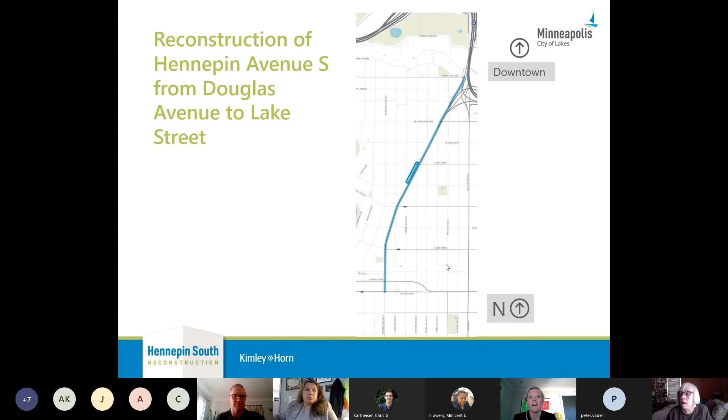Just a reminder, this is a reconstruction project, about a 1.4 mile segment, Douglas on the north, Lake Street on the south. Lots of stakeholder interest, as you can imagine. We have 3 neighborhood organizations, 2 special service districts, a business association, and lots of engaged residents and business owners, both along the corridor and within the neighborhood, who have been providing feedback on both options released in early March.

And Jonette, I think, is taking it from here for a bit. Yes, so the last time we were with the PAC, we had several different options with different configurations. Over the last few months, we've narrowed down all the dozens of options we looked at to 2 main design options. Option 1 is the one with the bikeway; option 2 does not have a bikeway on Hennepin Avenue.

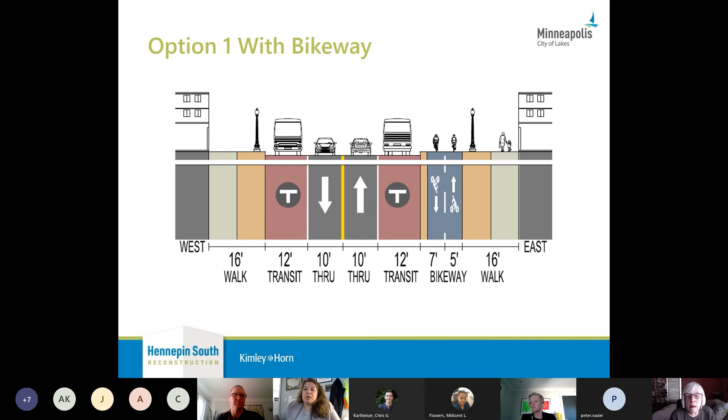These have been laid out along the whole corridor to give the PAC and the public enough detail to provide meaningful comments. This is a snapshot of what the layout looks like, with the sidewalks in the lightest color. We have a 2-way bikeway on the east side of Hennepin Avenue, we can talk more about the reasons for that, 2 full-time transit lanes shown in red, and 2 vehicle lanes, 1 in each direction. The orange on the layout are BRT stations.

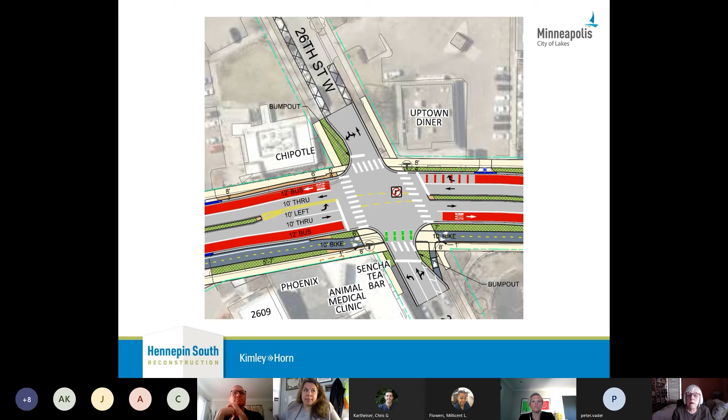And then this is an example near the BRT station, so this is near 25th. You can see where we have both the BRT platforms. We're also trying to achieve the bend out design to pull the bikeway away from Hennepin Avenue and provide that buffer space, and provide the shortest crossing possible.

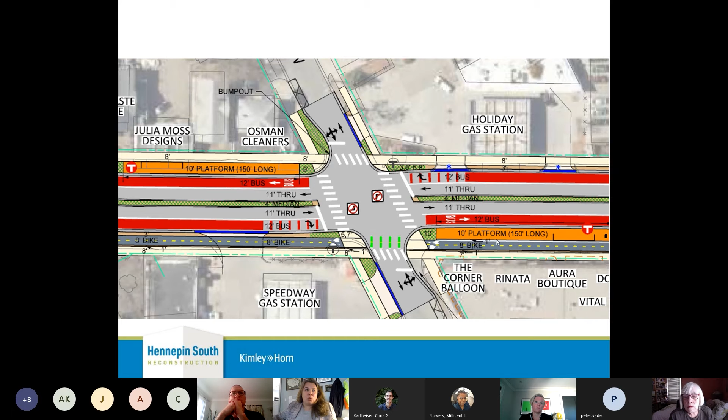You can see we do have some sidewalk constraints, and then you can see what it looks like where the BRT platform, the bike, and the sidewalk are all next to each other.

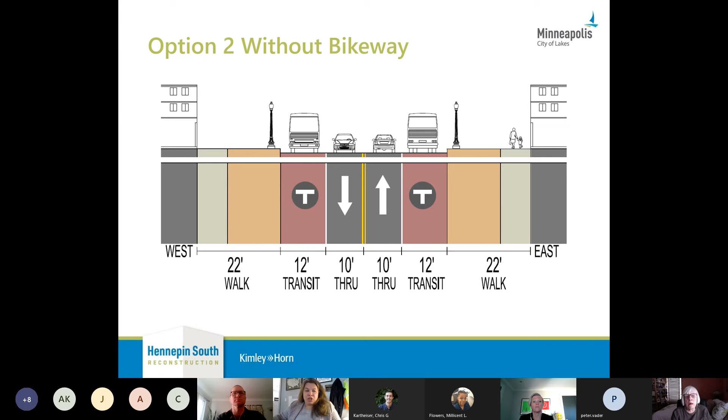As I mentioned, option 2 is very similar in terms of the transit and vehicle facilities, but there is not a bikeway on Hennepin Avenue. What that means is that this brownish, orangish space is much larger - that space can be used for greening, sidewalk cafes, sustainable stormwater features, on-street parking and loading. That's the main difference in this option.

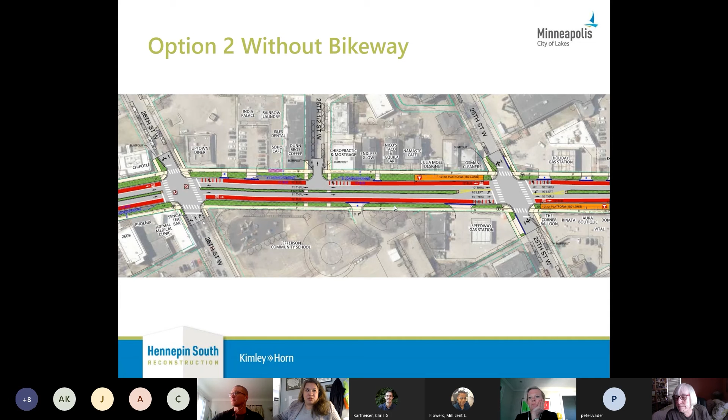So again, just giving an overview shot of that. You're seeing more of the green and brown areas, which indicate the boulevard and the furnishing zone.

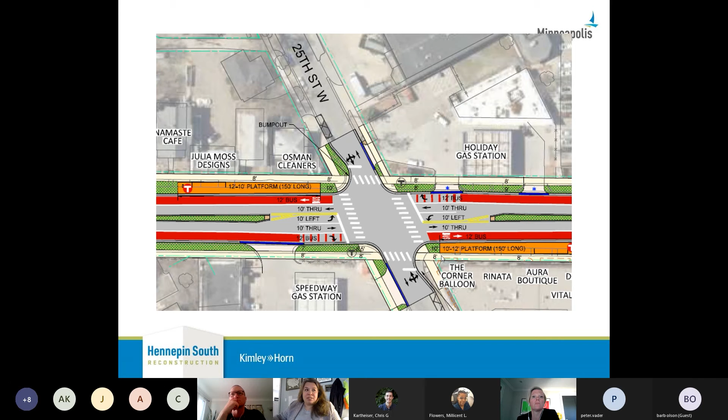So at 25th, in the layout without the bikeway on Hennepin, there are actually left turn lanes at 25th. On the layout with the bikeway, that wasn't able to fit, so the left turn lanes are removed in order to keep the BRT stations at 25th. You can see there's a bit more space on the sidewalk and in the furnishing zone on this option.

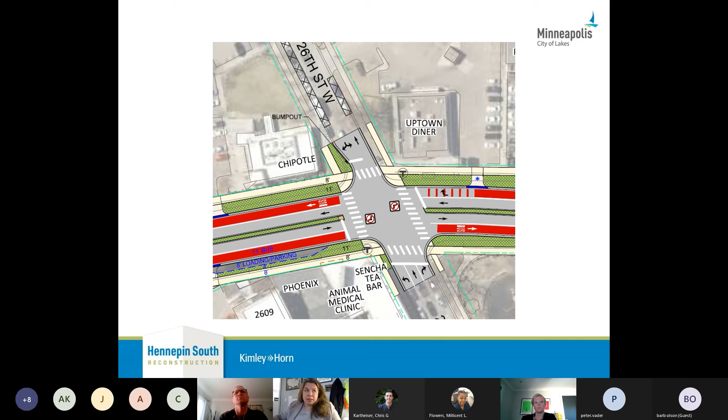Then at 26th, as I mentioned, there aren't left turn lanes at 26th, so the left turns would be restricted during much of the day. Again, you can see the larger furnishing zone areas.

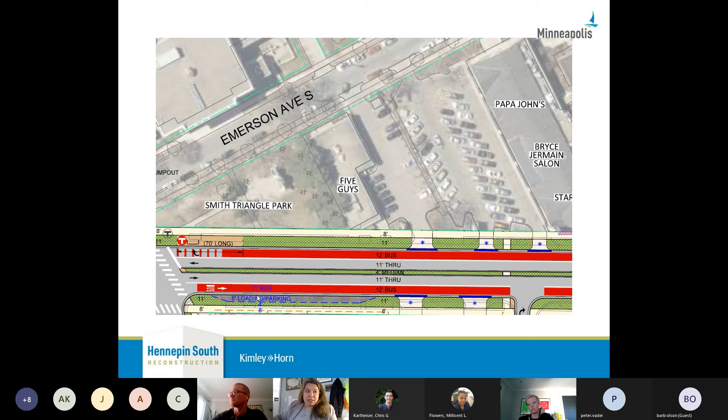And then this is one example of parking and loading. This is an issue that we've heard about quite a bit from businesses. We've also heard from some folks who don't want parking and loading in the corridor. We know that there are loading activities that do occur in the corridor, and if there aren't spaces for that to happen, that will happen in the bus lane, which is also not what we want. So there are some select locations where we are showing parking and loading.

And that is in both options. There are more of those spaces on option 2 than option 1.

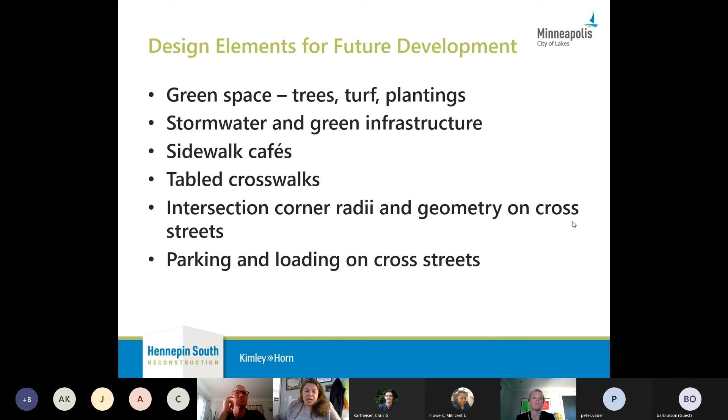Then there are a number of things that, obviously, we're still at a relatively early phase of design, so there are some things we just don't know yet. They need to be further explored - they're part of the detailed design. Some of those things have to do with green space, stormwater and green infrastructure, tabled crosswalks particularly for the cross streets where they intersect Hennepin, the details about intersection corners and geometry, and then parking and loading on cross streets.

Some of the specific things we identified where the PAC input would be most helpful - we started a list here. Becca, do you want to touch on these briefly?

Sure. Just in terms of the bikeway and the sidewalk design separation treatment on option 1, we'd love to hear more of your thoughts about that.

I imagine that there might be some interest in benches and other types of amenities like that. In terms of the minor street intersections, I think it would be good to hear your thoughts on incorporating tabled crosswalks along the corridor, and what your thoughts are related to the median. We've heard some mixed opinions about it, but curious what the PAC thinks about that. And then also the crossings that have been put in place on some of the shorter block segments along Hennepin.

As well as general comments related to operations, whether it's LPI, no turn on red restrictions, things of that nature - I think that would also be beneficial, in addition to the other topics you'd like to talk about tonight.

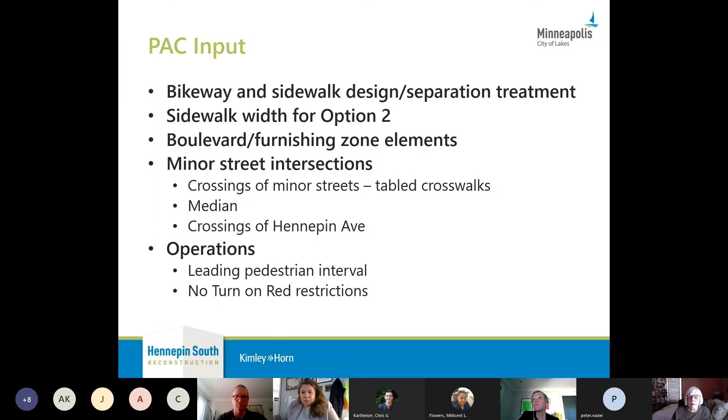Could we get clarity on where we're at in the process first? I know there's more engagement happening in July, but I'm curious, is this going to TPW? What is happening in July? What will you come back to us to ask about versus what's definitely being narrowed or focused on today? Sure, great question.

In terms of the overall schedule, we've been able to push out construction a bit on the project, which gives us a few more months to work with this year. We'd anticipate coming back to the PAC probably two more times, one more time as an increment before we bring a final design option. Being at the 10 to 15%, we still have some work to do, and as Jonette mentioned, there's a lot of detailed design work we need to work through.

We are still intending to move forward to TPW, at least at this time, for layout approval in August. That's generally the schedule we're working with, and we've got a little bit of play in there because of the push of construction out to 2024.

So TPW is in August. The overall city council process, whatever happens, the final point where everything is set is even further out than that. Layout approval is typically about the 30% marker, and that's when we bring it forward to council. So we're about halfway there theoretically to layout approval for council. Detailed design, the 30 to 100%, transpires after layout approval.

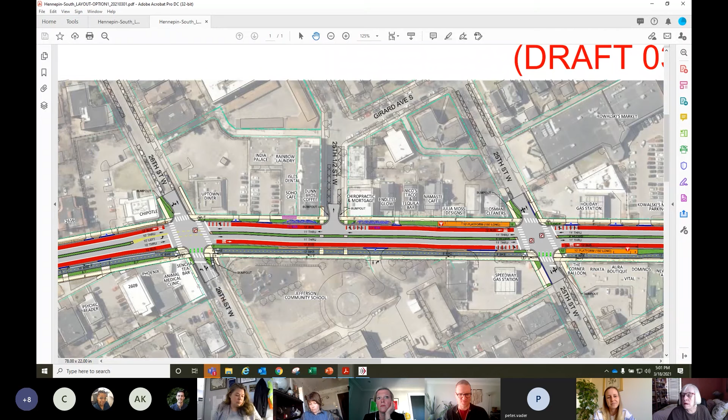I just have a question as a new member. I'm wondering about the bus lanes, are those going to be 24 hours or?

No. Hi, Matt, you just froze. I did hear the question about whether they'd be 24 hours. The intent right now is that they would be designated as 24-hour bus lanes, correct? I didn't hear the rest of your question, however.

I have a follow-up though. Okay, I'm just wondering if they are 24 hours. Can you hear me? Sorry, that was timing. Can you guys hear me? Yeah, we can. Okay.

I'm wondering then, as a follow-up, what the thinking was between making it 4 lanes between Uptown Transit and Lake Street, because I believe it goes back down to 2 lanes after that on both sides.

Yeah, I'm going to rely on Jonette to answer this one. Believe me, we've struggled with the 3 really busy intersections, Lake, Lagoon, and Franklin, for lots of issues, but we knew we'd get questions on this. Jonette, I'll turn it over to you to get into more of the specifics. Thanks.

One of the challenges between the Uptown Transit Station and Lake Street is that the blocks are very short, shorter than other parts of the corridor. There are also a lot of turning vehicles, so trying to manage vehicle traffic through this area while also providing good bus facilities, we tested a lot of options. What we're showing now is what we feel is the best, not only for buses but for traffic. Certainly this is an area we've heard comments on, and we'll continue to take a close look at it.

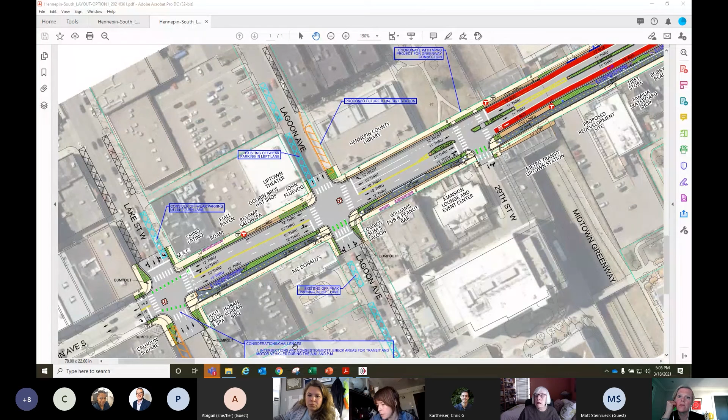We're not seeing crossings at all legs of all intersections. That's concerning to me. It seems to prioritize right turning vehicles over people who want to cross the street, and that's been a consistent ask from the PAC. We do see them with the bus turn, which surprised me as even being feasible since it seems to be mostly bus turning motions. But we need to have them everywhere.

I'm curious about what's being done to address the late night drag racing and what happens in a lot of the times of the day where there aren't as many drivers. It's not a pleasant street to be on. Regarding all intersections, I would think we'd want to support removing as many driveways as possible, using any means the city has at its disposal. I'm glad that's being examined. Those make things really bad.

And tightening the radii, I don't know if we're getting into that, and some of the really weird turning motions. We're also not seeing all legs of all intersections for all the north-south streets that truncate into the east-west streets that cross Hennepin, and there's very odd driver behaviors at those, especially in off-peak times, where there aren't drivers preventing just random driving across things.

And I'll zip it again. Okay, you were kind of going in and out a little bit for me, so Jonette, I don't know if you heard all of that. I didn't quite hear something. I heard something about the right turns and the bus lane, but I didn't quite understand the comment.

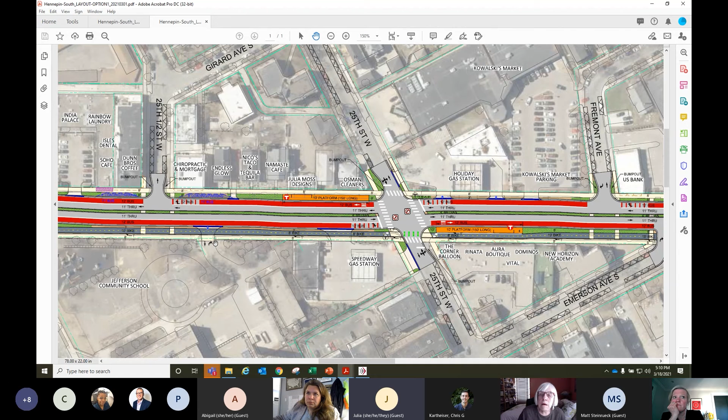It's a really horrible street to be on with the entitlement from drivers. But when we talk about tabling intersections, that seems like it should be tabled regardless of whether it's a street or a driveway, if we're talking about doing raised intersections at all intersections, including these minor ones. So hopefully that would be a moot point in terms of a reason to treat it as driveway versus street.

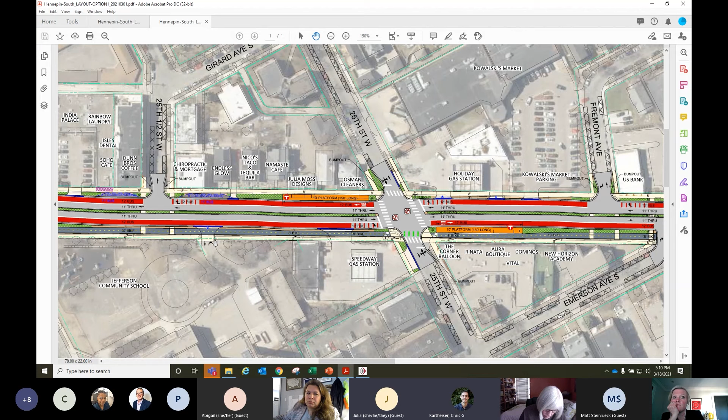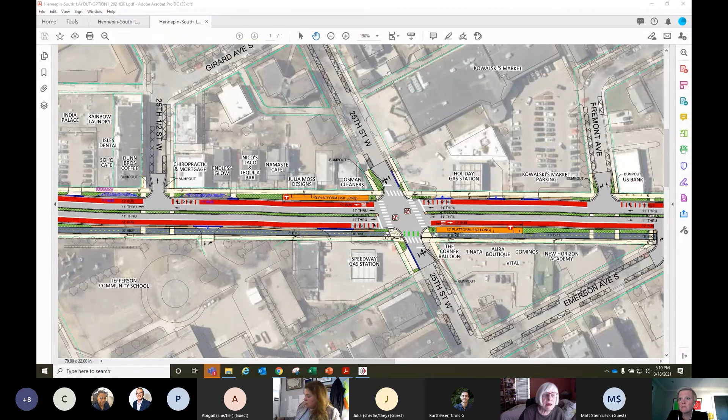One thing I want to say is that I agree with Abigail in terms of the support for the transit. I really think that's important, and I don't understand why it's cut off from Lagoon to 31st. So I'd like to see that.

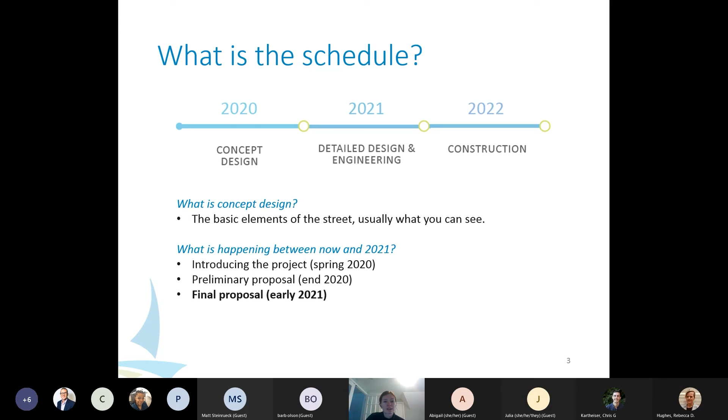As a reminder, we are concluding the preliminary concept design work, moving into detailed engineering for the rest of 2021, and preparing for construction in 2022. It's going to be one construction season, which in Minnesota is April to November for this segment. I don't have the graphic here, but it's the 3 blocks from Hennepin Avenue to Lyndale Avenue.

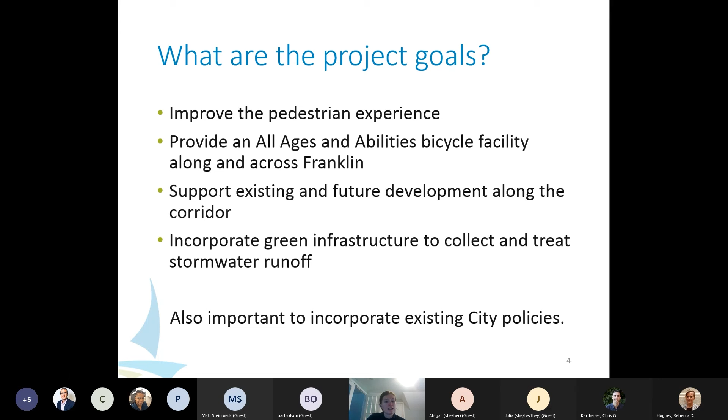The project goals are to improve the pedestrian experience, provide an all ages and abilities bicycle facility, support existing and future development along the corridor, and incorporate green infrastructure if possible, while also incorporating existing city policies.

So this was the December 2nd draft. I'm going to blow through this a little quickly in order to save time for your specific questions. A big improvement being proposed here is this median at Bryant.

Bryant Avenue is a bicycle boulevard, and just to the north of this drawing is the Loring Greenway, which provides at least 1,200 bicycles a day with a trip. So there's a lot of bicycle traffic going through here. There's currently a median at Bryant, with the far western portion and far eastern portion existing today. The proposal is to make it larger and also add this middle component, which would prohibit left turns in all directions and would prohibit a north-south movement for cars on Bryant, while providing channels here for bicycles in the middle and pedestrians to the side.

We're adding boulevards—there's really no boulevard out there today—and green stormwater infrastructure where possible. Right now we're talking about little curb cuts essentially to allow water to access these new green spaces instead of running straight down the hill down to Lyndale.

The sidewalks here are at least 6 feet wide. In some places they are 8 feet. We're talking about adding a bicycle facility behind the curb, with eastbound traffic on the south side of the street and westbound traffic on the north side of the street.

Transit amenities here include a shelter dedicated for Route 2 customers instead of sharing with Hennepin Avenue customers, a shelter on the south side over at Lyndale, and a signpost again, because it's mostly people getting off.

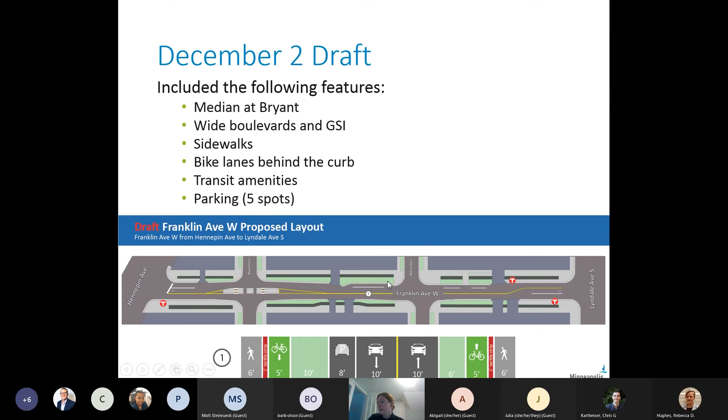This is the end of the second to last stop on the 2, so very few people wait for the bus at this location. And 5 parking spaces, 3 here in a bay, pulling them out of traffic a little bit, and then 2 more parking spaces on the other side of Aldrich.

So that's what we talked about last December. We then engaged in our typical outreach process. We used open houses, online neighborhood meetings, online surveys, and one-on-one conversations by email and phone to gather feedback from folks interested in this corridor. Also connected with property owners along the corridor about right-of-way and construction impacts.

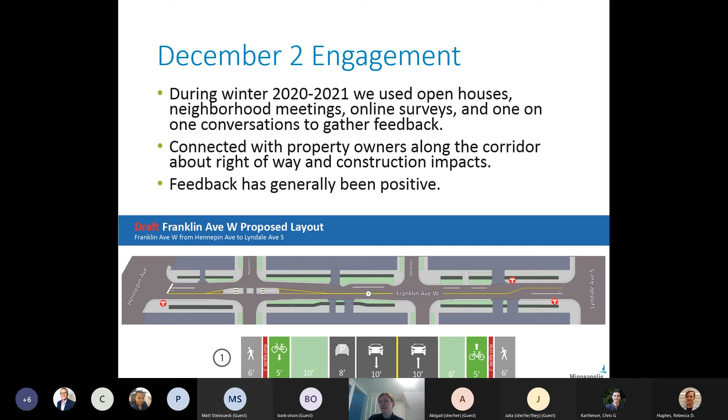Those questions have been coming already. And generally the feedback was really positive. We ran some numbers statistically based on who participated, how people felt, but feedback has been positive, if a little quiet. This has not been incredibly controversial.

So that being said, some changes have been incorporated since December 2nd. The first is we're including the evaluation of raised crossings at Aldrich and Bryant on the north and south sides of the street. It is too early in the design process right now to know if they're a good fit for this corridor. The steepness of the hill down to Lyndale can make raised crossings too difficult to incorporate. This difficulty is tied to grade changes, the dirt underneath the asphalt, and substantial impacts to Bryant and Aldrich.

If we only have to touch 50 feet of Bryant or Aldrich, maybe that's okay. But if we have to touch 200 feet of Aldrich and Bryant, that might be too much. And of course, cost. We'll know in early 2022 if raised crossings can be incorporated.

The other thing that we're changing is, I've sort of gone out of my way over the last several months to say we're not touching the corners at Hennepin because the Hennepin project is touching those corners. And we're not touching the corners at Lyndale because it's a county facility, and we didn't want to get things too complicated with the county. Well, that has now changed at Lyndale.

When we were looking to tie in the new bicycle and pedestrian facilities at the corner at Lyndale, it was getting kind of awkward and crowded if we didn't touch those corners. So we had a good internal conversation a couple of times with other folks in Public Works and determined that we could rebuild the corners at Lyndale without causing too much cost and signal needs. Just for the placement of where the signals are, it makes it possible to touch the concrete underneath without getting too expensive on the signal work above the ground.

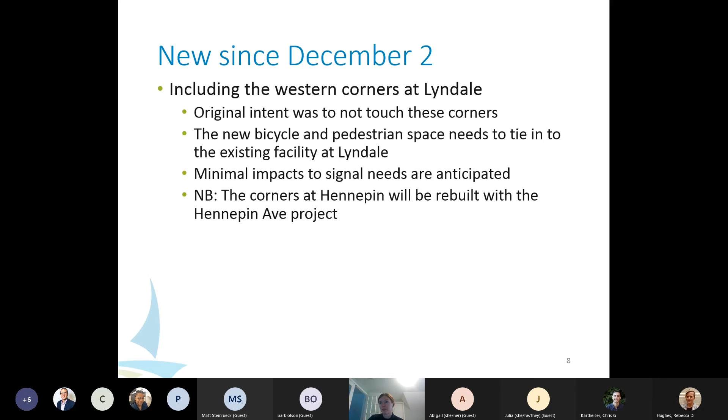So that being said, here's our new design that we're talking about. These light pastel yellow colors indicate the potential for future tabled crossings. Again, we're not 100% confirmed that we'll be including raised crossings, but it's something we're dedicated to continuing the conversation on over the next several months, and hopefully we'll be able to incorporate it. And then the other changes here, of course, are the corners being rebuilt at Lyndale.

Other things, very small things, if you compared the December design to the March design, this section of the bikeway originally did a little jog, a bend in and then a bend out again. We've been able to straighten that out. But in general, the main components of this project have remained very similar. So that's the summary of what's going on, but I wanted to spend most of the time talking about your questions, if that's okay with you.

Thank you, Katie. Any questions or comments for Katie regarding the design?

I just have a question regarding the slope down to Lyndale, particularly on the north side. Has there been any developments, discussion, or concepts about that since December? No, I'm talking about the sidewalk, that I personally find somewhat treacherous in the winter just because of the grade and stuff. I know we had talked about maybe there's a possibility for a railing, or different things that we had discussed in December.

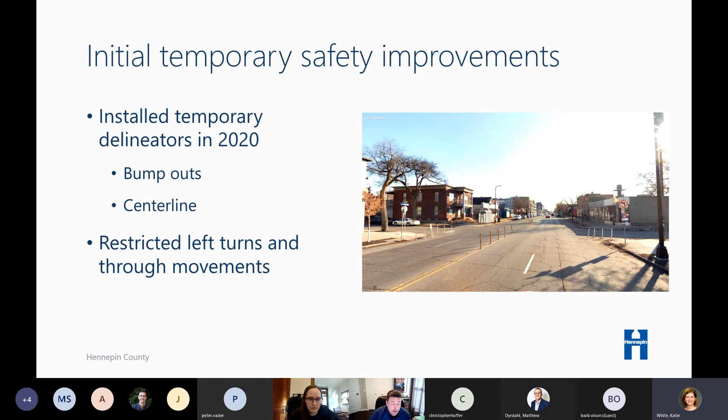As you can see, there's a gap in those center line delineators, so there's probably a lot of violations of people taking left turns there.

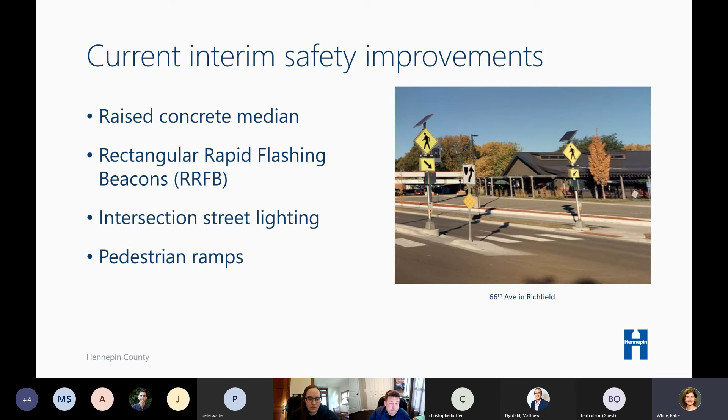With this proposed design, the travel lanes get pushed out towards the curb line, and we'll be maintaining 2 lanes in each direction. We'll talk more about the future of this corridor soon, but this is a quicker project to get some sort of improvement out there in the interim. The bus stops will be relocated slightly to be further away from the intersection, and our goal is to have this done later this summer.

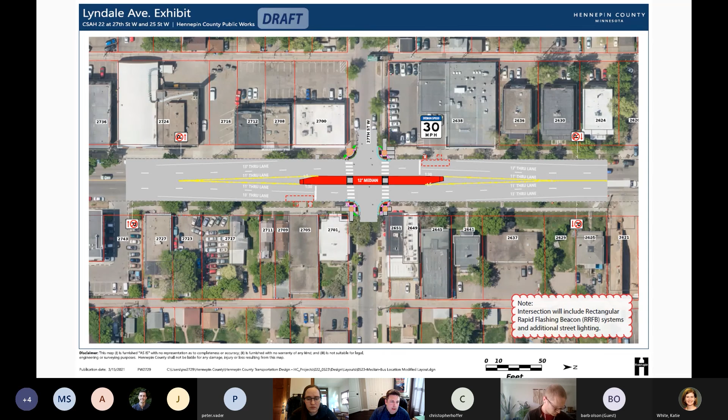So with that, I'm going to pass it off to Nariman to talk about beyond this project. Yeah, thanks Jason. Today we're here to really talk about the project coming up this year and these 2 safety improvements at the locations Jason referenced. But we understand there's interest in the corridor as a whole, so we want to make sure we address that and answer any questions you may have on that as well.

As Jason mentioned, what's proposed to be done out there this year would be a continuation of the delineators placed in 2020. We had a listening session with the neighborhood and the interested community back in 2019, and this is a progression on that. But to address the corridor as a whole and make the safety improvements necessary for the corridor as a whole, we really feel like a reconstruction project is what we need to accomplish that.

And so we've been focusing a lot of our attention and energy on that process. Last year, it was included in our 2021 CIP, transportation CIP, as a provisional project. We continue to work towards having a fully funded project for this corridor. We also understand that process can take some time, so we want to continue to look at all available options to improve safety out there.

In addition to what Jason referenced during his presentation, we've also begun looking at the feasibility of a potential 4 to 3 lane restriping project. That process has begun and will continue through the next few months here. As that process develops, we'd be happy to come out and talk to folks again specifically about that.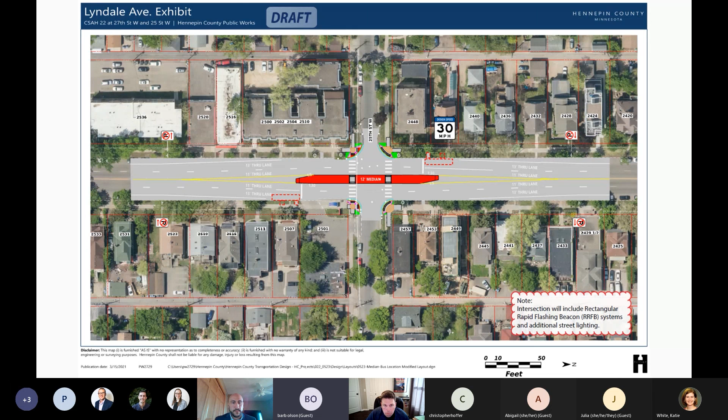Any other feedback or comments? Nariman, Kelsey, or Jason? I was just going to say...

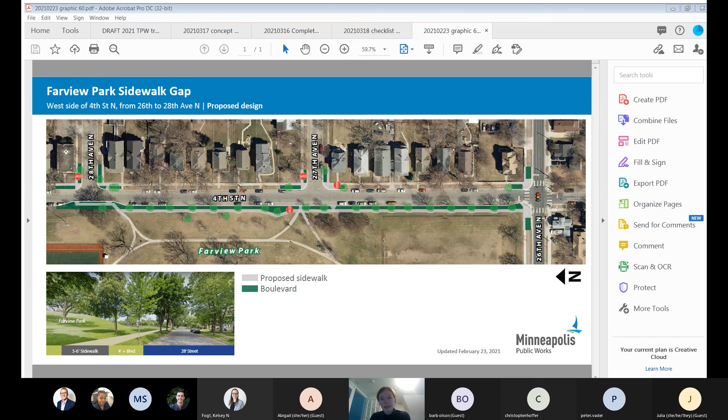I'm going to zoom in. We have a 6-foot sidewalk, and we aren't taking out any of these trees, that part hasn't changed. But I am going to zoom in over here to talk about this, and I'll do one more to talk about this part.

So what we were planning to do was end the sidewalk about where you can see my cursor here. There's a beautiful tree here, which you can see illustrated with this graphic tree, but you can see how big the tree canopy is in the aerial photo, it's a gorgeous big tree. The park board's not interested in taking it out, we're not interested in taking it out either. It's not elm, it's not ash, not susceptible to disease, and so they wanted to keep it.

So our goal was to put in a crossing here, just short of where a normal pedestrian crossing would be, and do a receiving end pedestrian crossing over here, just short of where it would normally be. We got into designing what the construction of that looks like, but to put in this curb ramp just short of where we thought it was going to be, it was going to damage the root structure too much to this giant, beautiful tree.

So we tossed around some options about what we could do on this side of 28th to make this a reality, and we came up with an option that actually adds even more sidewalk. Here's the traditional sidewalk with a boulevard space separating you from the curb. Now what we're doing is bumping the sidewalk into the street itself, so the traditional curb would be about where the back of the sidewalk is now. That means putting a new curb line into the driving or parking space, reconnecting with the curb on the north side here, and adding another pedestrian ramp crossing on the north side of 28th.

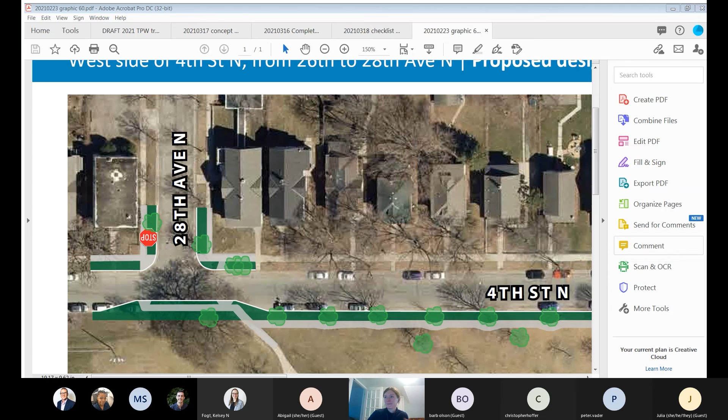Is Katie gone? No, I'm here, Julia. What's up? Do you have any tips for future projects like this? Like, what made it work that you were able to protect the tree, really provide good access that seems like it'll work for people with impaired vision, et cetera? What made this one work?

I think because it's a relatively low-use street, but it's a pretty wide street to begin with. I think it was 28 feet, and our traffic department said you can take away 8 feet, or 6 feet, I'm losing the dimensions right now, but traffic said there's plenty of through lane space there anyways, if you were to bump it out. So there was plenty of space in the roadway.

And at the same time, we did hear from some neighbors that Chris is going to talk to you about Lyndale next, and Lyndale is on the other side of this park in part. We heard from some neighbors that some people use Fourth instead of Lyndale because they think they can go faster on Fourth. So the idea of making a pinch point here was also a no-brainer, and we were comfortable with that too.

Thank you. I did the bike-ped count right at that spot last fall, and cars definitely use that street to race right through it during that evening rush hour.

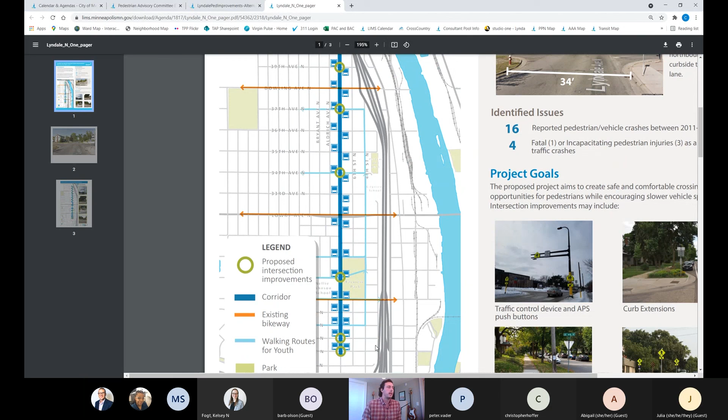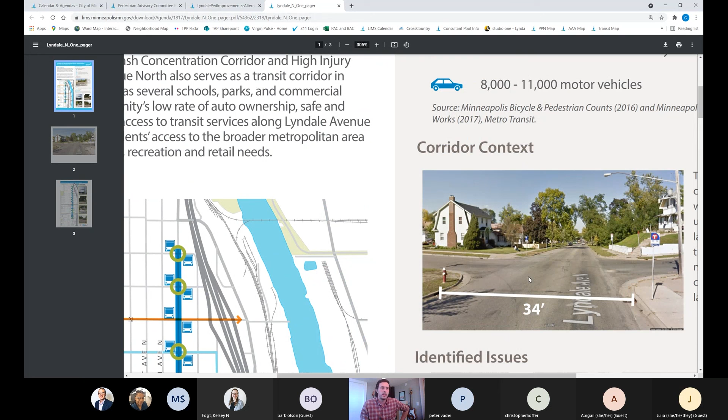So there are 7 intersections between 40th Ave North at the north end and 22nd Ave North at the south end. Lyndale Ave North, on the right side of the image here, I'll zoom in, has 1 northbound lane for vehicle traffic, 1 southbound lane for vehicle traffic, a southbound parking lane, and then sidewalks with at least some amount of boulevard space for most of the corridor. So that's what we're dealing with here.

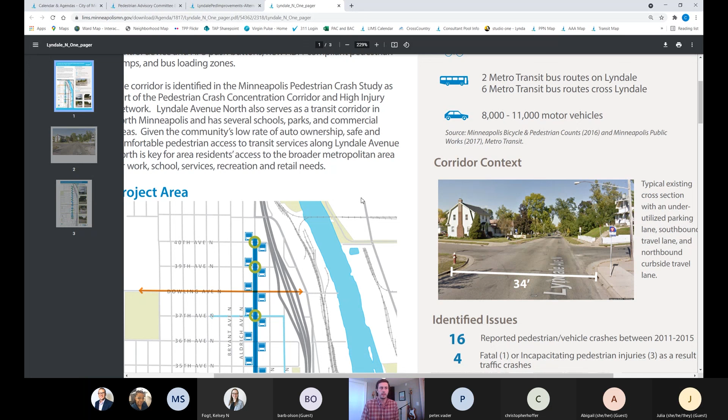And another refresher reminder, the real problem out here, I'd say, is speed, which you can say about a lot of our streets, but it's definitely very much an issue here. We did a speed study, and almost everyone is over the posted limit, which at the time was 30 miles an hour; it's now 25. A very good chunk of people are going over 40, probably over 45. It's really fast, and you can feel it out there. That has had an impact on the number of fatalities and incapacitating pedestrian injuries out here. So that's just some of the impetus for the project.

I'm going to kind of go through. I'm not planning to stop on every intersection.

I'm going to do a high level presentation of what we're proposing out here, and then I'm happy to bounce around to any specific intersection if you like. But really, what we're honing in on here, and what we're at with engagement, is 2 main types of designs. For each intersection, the main type of design we have here is this first one, which I'll call an S-curve.

It's got a chicane or curve in the roadway, with bump outs at the various corners. You can see the previous curb line here, so there's a lot of changing in the curb line on these. So yeah, this is one option, the S-curve.

And then the second general option is still a little bit of the S-curve design. There's still a little right to left movement for vehicles when driving, so it's not just straight through, which we know causes folks in vehicles to slow down, and that's the intention behind the design. But this other option is to have a median as part of this as well.

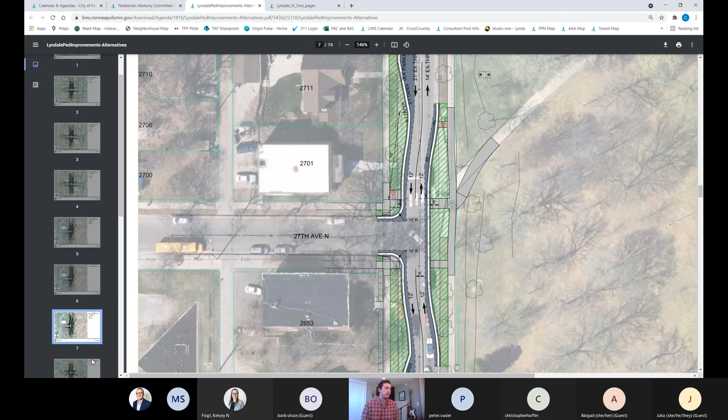So that is generally the things I'm hoping to get feedback on, and then obviously wherever you all want to take it as well. So I'll just open it up for questions from the group or comments.

Chris, I just have one question regarding funding and the budget part of it. At first blush, the medians appear more beneficial in this context. Having said that, what are they giving up specifically? Could more intersections be treated with the non-median revision, or where does the money come from if medians are put in? Does it shrink the project meaningfully?

I'll give a brief budget overview. We were awarded federal funds for this, so we got $1 million of federal funding. There's a minimum 20% local match, and then we have about $2 million total for this project, which also includes the costs of engineering and soft costs, as well as the hard costs and capital costs. So basically the funding is pretty much set, and it's figuring out how far we can take the design with that funding, if that framing makes sense.